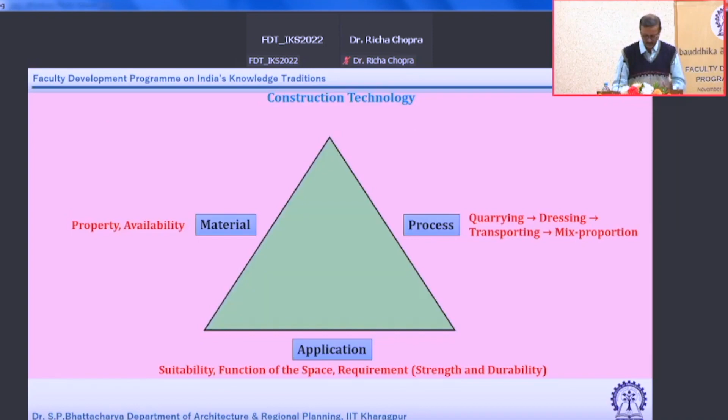So I have just now told that is the material, it has a process, it has the application. With this particular triangle, we have to actually go with the engineering and management. But what I will actually deal with today is this 4 segment of Indian knowledge system in the construction practice, the Nirman.

And these 4 are the applicable areas, the thought areas or thinkers that give us a particular way. One is material sensitive construction, how they use the material for construction, and the best material is used for the best purpose. Next is structure sensitive construction - when I evolve a new type of building or any object to construct, I have to think how the structure can be held.

Climate sensitive is always there, when the human being enters into a cave. The home is a cave. It is climate sensitive, particularly, and also for protection from wild animals. So that is the very first one. And the last one is activity sensitive - we will also see how activity changes the design pattern and construction pattern.

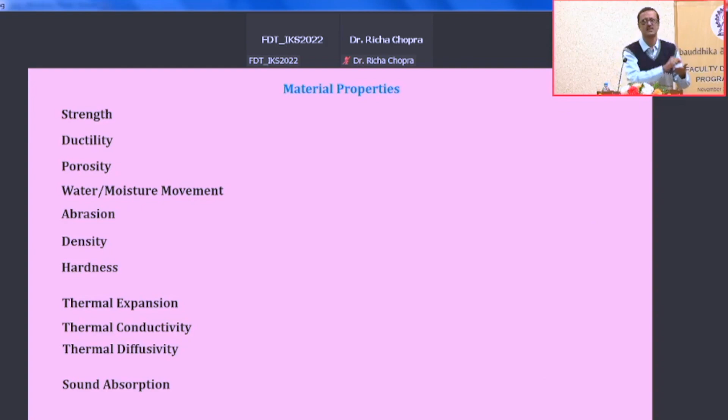So these are the typical parameters that in modern times we say - what is the density of the material, what is the strength, tensile strength, and so on. These are taken care of in the domain, and we'll see that strength and ductility are used for structure sensitive areas where there is a span and huge amount of loading.

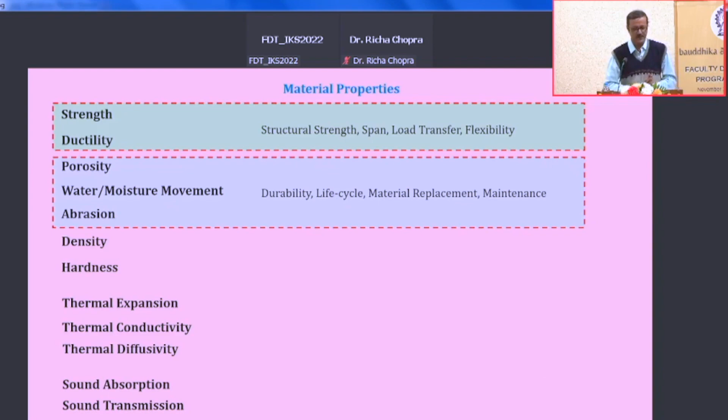This porosity, water absorption, these import into the durability, life cycle of materials, and maintenance point of view. The density and hardness - if you see all the temple architecture, the carvings and all, they have chosen those stones from the density and hardness point of view, from the decorative features point of view, and also the total project time, manpower requirement, and all those things.

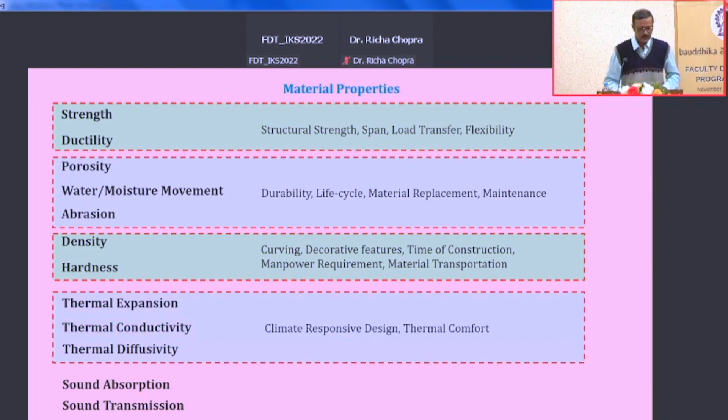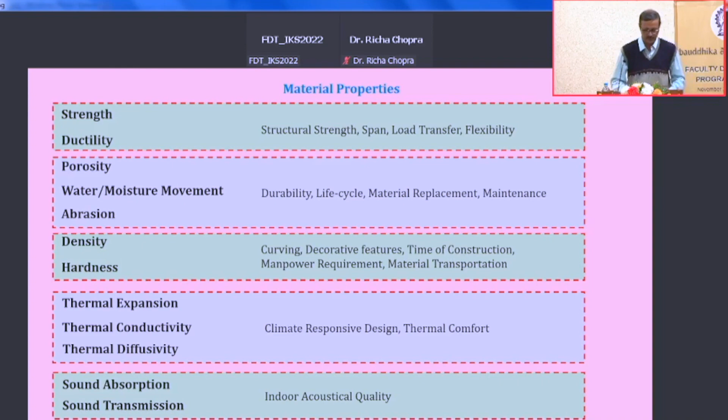The thermal expansion, thermal conductivity, etc. has taken care of the climate sensitive part, and the indoor acoustical quality, which also was imparted in some of the palaces - if you see in the Rajputana, I mean Rajasthan and all, they have also imparted those kind of properties, they have influence of those properties.

So in the Vedic period, if you see, in a nutshell, in that particular era, the quality of the housing is the measure of development. It was since then that we have imported that the quality of housing is a measure of development.

And there are a lot of Vedas, particularly the Atharva Veda, which give some kind of guidance. In between I must say I am still a learner, and this is a huge subject. And the biggest lack in me is that I do not know Sanskrit, because by virtue of my education I was not allowed to learn that particular subject. In my school days, there was no option to take that subject. So that is one of the biggest difficulties.

But hopefully, with the things I'm still learning, I can see what things are there, and that can be brought forward. So those are the science, the Sthapatya Kala and all - those are still there.

Now if I see this particular housing character of the early Vedic period, basically it was started with a circular manner. The circular manner is because circle is one of the geometrical forms which can be actually placed on the site very easily. It's very difficult to actually create a square on land, because a square and rhombus both have all 4 edges equal, but square has equal diagonals and they are perfectly 90 degrees.

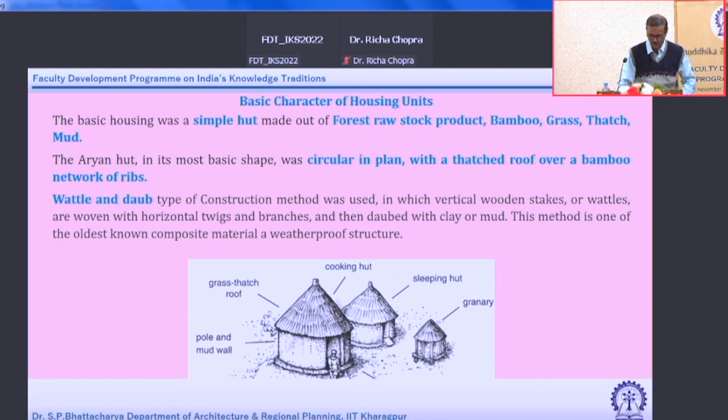Measuring a circle, square and all those things is very difficult. So that was the first approach. They start with a circular plan with a conical shape with thatched bamboo and all, and then gradually they go for this kind of shape modification.

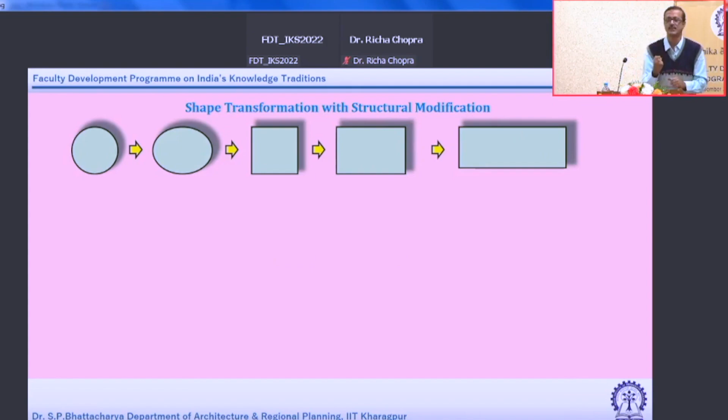So circle has some disadvantage also from the internal point of view. Not only in India, if you go anywhere, to African civilizations and all, they started with a circle and then gradually compartmentalized it into different room forms, with the central portion as their kitchen or something like that. So in India also it was gradually formed like that.

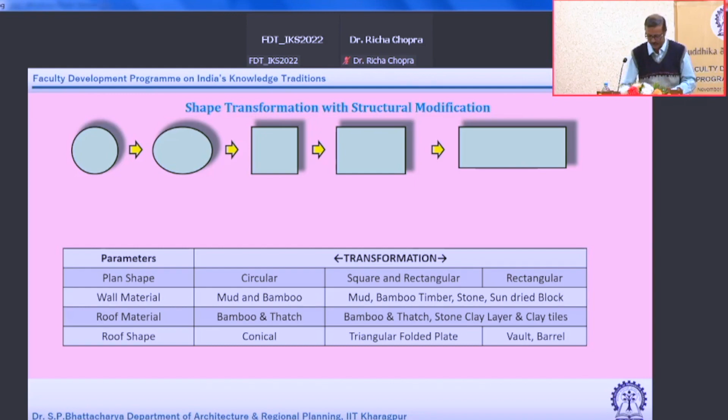Gradually it has come down to this kind of shape, that's square, the rectangle, and the deep rectangle. And by virtue of this, over the times, there were changes instead of the conical or spherical roof, conical to spherical roof.

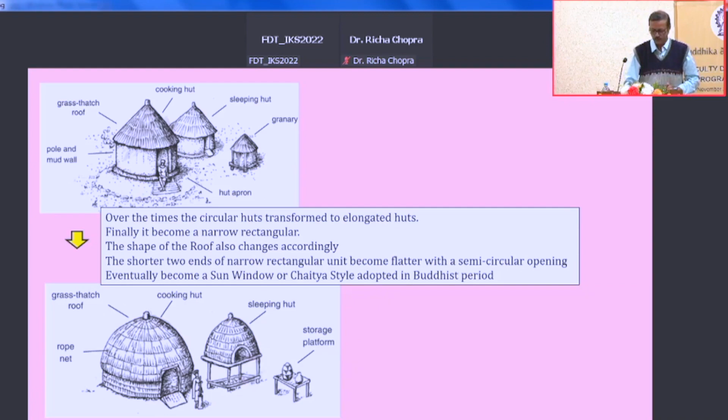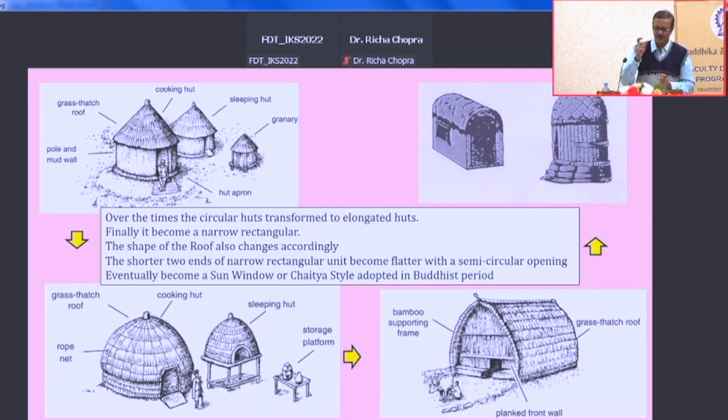Spherical, when it comes to a particular rectangular shape, has extended, making a kind of cylindrical roof. And this cylindrical kind of roof, when it was developed, you can see it as one of the creations of Buddhist architecture, where the Chaitya and all those things have been formed. So gradually it was developed like this.

From a building materials point of view, they mostly used mud and ribs, or this kind of wooden things. Both are very climate and energy sensitive. Probably at that time they did not know about energy problems, and maybe they did not know what concrete, reinforcement or plastic is, but still with mud, and still people are using mud and all those kinds of things, and it is very good material.

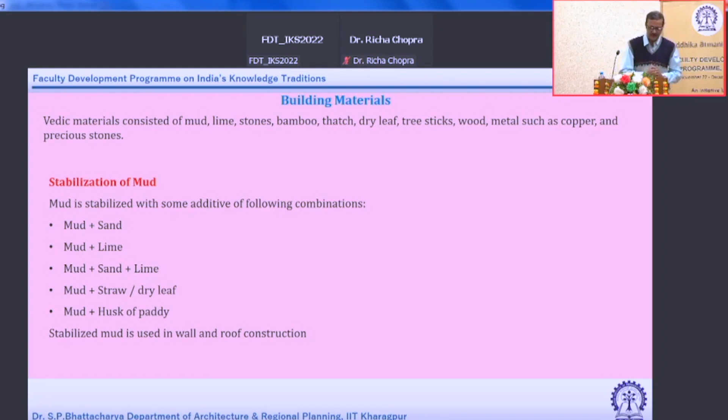Of course, with mud I cannot construct a high-rise building, but in a particular kind of arena we can still exploit mud. Mud only requires some kind of stabilization. Those days they used sand, lime and sand, dry leaf, husk of paddy as a stabilizer, and they also used plastering material. If you see, that actually changes.

Suppose in the Vedic period there is a kind of people living in a particular society. The mukhiya of the society, and their houses are maybe that particular place where they actually come and discuss and all, that particular structure sometimes had a kind of plaster. That plaster was found to be gypsum, and that kind of plaster was used at that time.

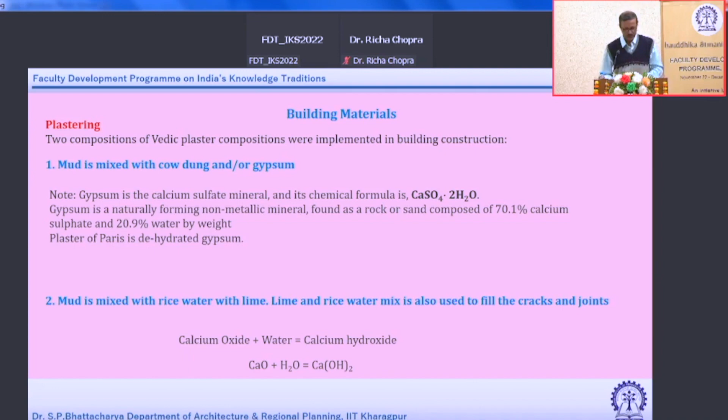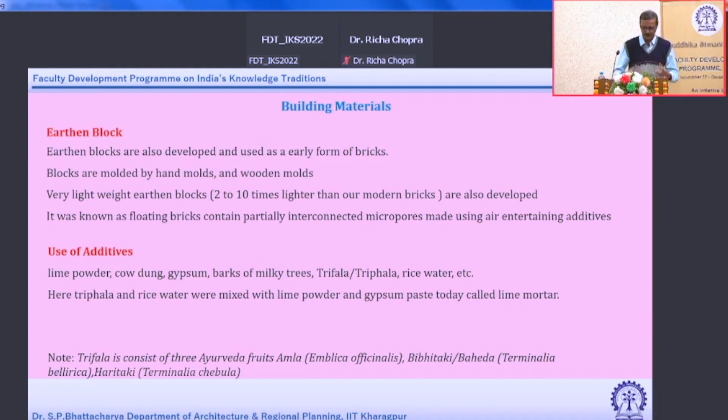Also they used some kind of earthen blocks which are much more stabilized, and they used this kind of trifala as one type of additive that can give a particular better bonding and all those kinds of things.

This was transferred in the later period, more or less when it came to the Mauryan period. Timber came into the play. When timber came into the play, carpentry evolved. Due to the evolution of carpentry and timber coming into play, the language of architecture is also going to change.

Whenever any new material comes, the construction people will recommend the material, and then probably the architect will start thinking how best to use that particular material for any purpose. So the language of architecture changes. Suddenly they can think of using timber, I can go a little higher in level, I can have 2 floors or maybe multi-floor kind of a thing.

And then there is something like a kind of society, a big society, and the kingdom is coming into the picture, so they need some kind of secure arrangement, so they go for some kind of bastion, gates and all those kinds of structures which require much stronger material. So instead of mud, they believe in stone and timber.

There is this particular effect of the material, still we can see in some of the vernacular architecture. Vernacular architecture means the architecture that flows generation after generation. No one having a degree in architecture or scientific knowledge of architecture is going to impart it to do a particular hut which maybe my forefather has constructed.

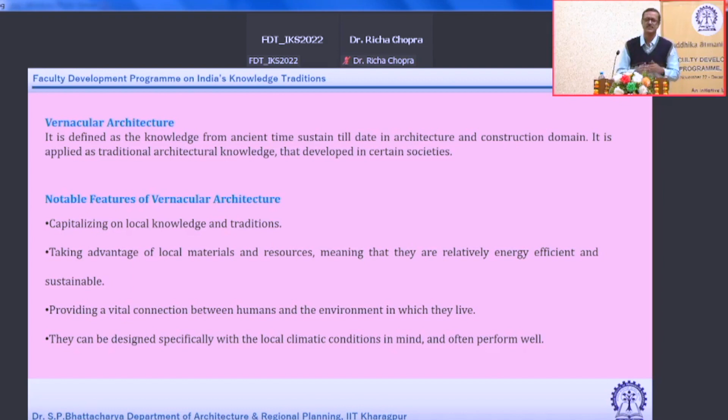They are much more climate friendly and material friendly.